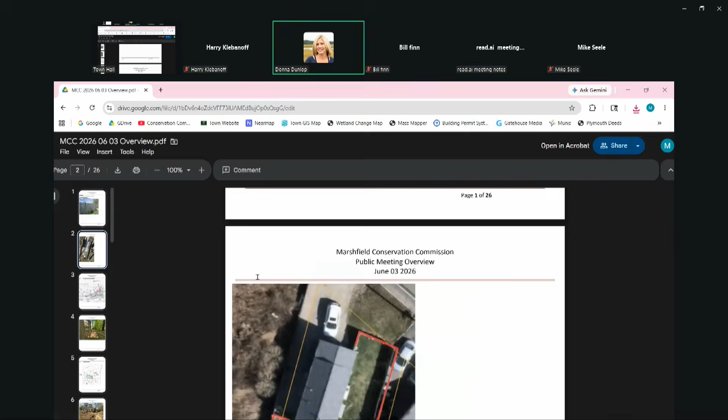Are you just seeking a one-for-one replacement of what's presently there? And next to it, that fence doesn't belong to me. I'm not doing anything alongside the wetlands, so if you're looking at that picture, the way I see it, it would be the fence to the right, in between the two properties, and then the fence in the back.

Okay, and what type of fence are you proposing? Wooden.

Mike, do you have any comments? Yes, my understanding is that essentially it would be a one-for-one. It would be built essentially in this style here, as noted by the homeowner. The property owner to the right of them in this picture owns that fence. They're building essentially a section of fence that they own adjacent to that fence, bordering the property. But to my understanding, it's going to be a 6-foot wood stockade fence as seen in the site visit pictures.

Is that accurate, Ms. Dunlop? It's hard for me to explain. Have you seen the wood panels on the front of the property? I don't know if you went to view it. It'd be the same wood. I don't know how wide the panels are. Maybe, I don't know how to explain that.

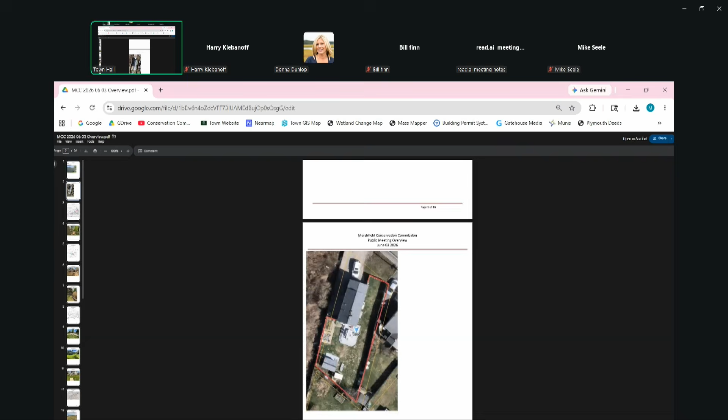Is there a way for you to view the front? No. Is the person that was there who viewed it available? Yeah, I viewed it. How tall would you say that front fence is? It's about 6 feet, and the planks are more of a timber plank than a typical picket fence.

Yeah, so I guess I just don't know the language. I didn't know how to be prepared for that. So whatever that is, I want it to look like that fence, since I'm paying for this in full myself.

What, in this area, is there certain spacing that's required, Mike? Yeah, this is within a barrier beach coastal dune. Typically with fences built in this area, they're built with adequate spacing on the bottom and between pickets to allow for the flowage of floodwaters, which is something the commission typically permits with a 1-inch gap between pickets or planks, and then 6 inches between the lowest horizontal member of that fence and the ground.

Is that something you're amenable to? I guess so, if you could send me that information. Yeah, we can do that. I mean, if it's comparable to the other fences, that's fine too.

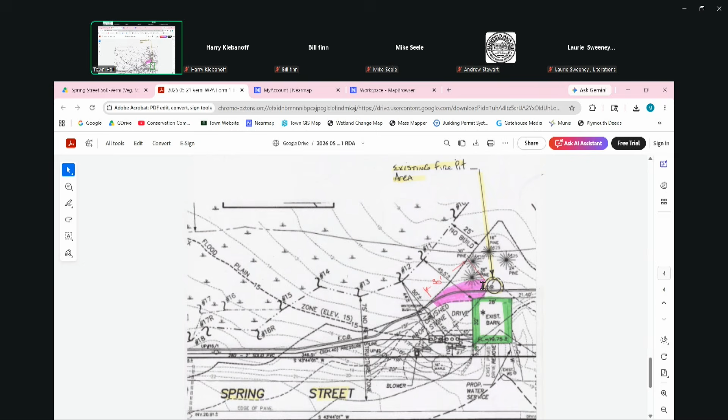And then this area highlighted behind the structure is the proposed patio area. And to build that, it's got to be permeable, either flagstone or pavers. Yes, so he's suggesting a gravel base with a brick border, and then some flagstone laid out intermittently as stepping stones in the area.

So I guess what you discovered is that there are conservation markers along the side of the house, but as part of his original order of conditions back in 2017, 2018, there were supposed to be conservation markers along the back, right? Yes, according to their orders of condition, for the development of that existing barn into a single-family home, they had to place conservation markers every 25 feet along the 25-foot setback, which I didn't note out in the field, especially in this area behind the fire pit.

I didn't note any. So that will have to be done by the homeowner in order to receive your certificate of compliance for that scope of work. Okay.

But as far as our hearing goes for tonight, in terms of the patio and the clearing of the brush, do you have any issues with that? I think it would be helpful to get those conservation markers on the 25-foot setback, especially in that area back there, around that fire pit and where they want to expand the patio.

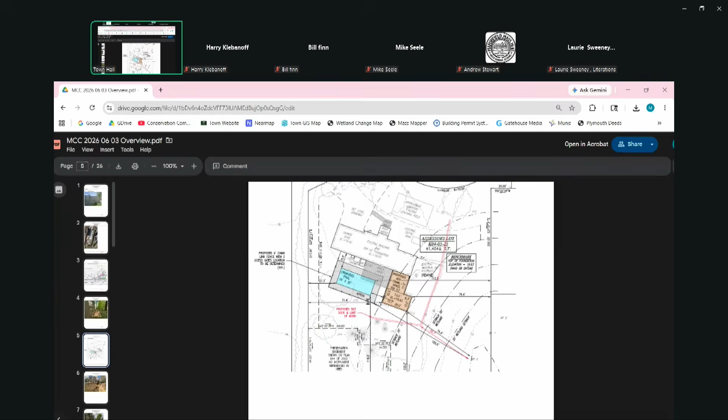Thank you. Mike, could you explain what's going on with this one? Yeah, so I did receive a call from Mr. Grady a few weeks ago, alerting me that there had been some sort of miscommunication and that ground had already broke on this project. Here I have captured my site visit photos.

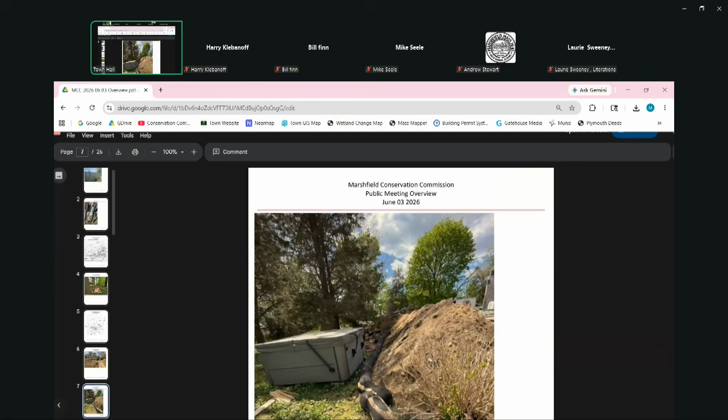At the time, when I visited the site, they had all appropriate erosion control measures up. As you can see, they had a 12-inch diameter erosion control sock. The work itself was within allowable limits by law, from my observations. So I instructed the homeowner that he could proceed at his own risk, and that this would obviously go through permitting where the commission could ultimately put more conditions on it or what have you. But yes, from my observations, the erosion controls were in place and effective.

As far as commissioners, I visited the site today. The work is substantially well along, but everything looks good. I'm not sure exactly where the glitch took place.

How did the permit get issued? So it came before the Conservation Commission, and as part of our normal review process, we take a look at GIS data and layers and everything. From what we could see, the wetlands were estimated well off the property and well over 100 feet away. When Grady was doing the site plans and sent out the wetland scientists, it turns out that the wetland came closer than what was anticipated. So that's essentially how it cleared through us.

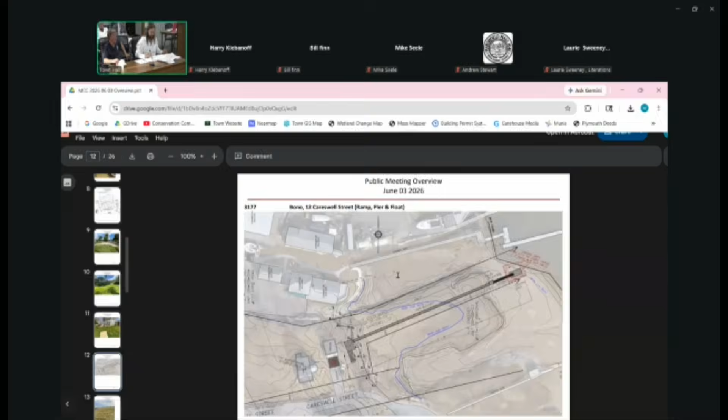Sure, I'm Colin Bono of 12 Careswell Street. I did my best to address the concerns that you had from the last meeting. So if you want me to just go down the list, I can do that. On your site plan, it's a little updated. One particular area, the dredging, the dredged area, shows a little more detail, both on the site itself and the graphic down below. So that was one of the items that you wanted to see.

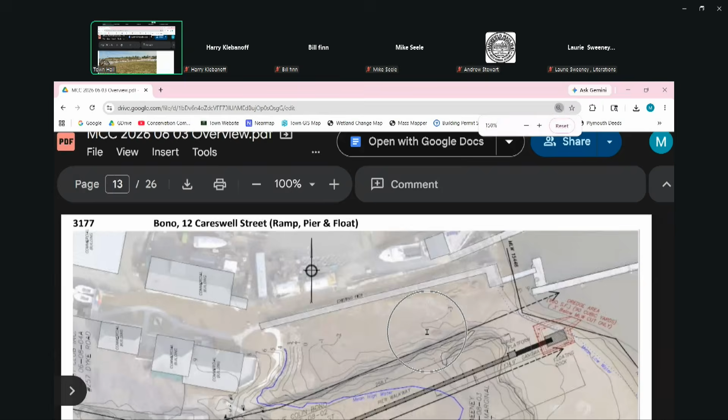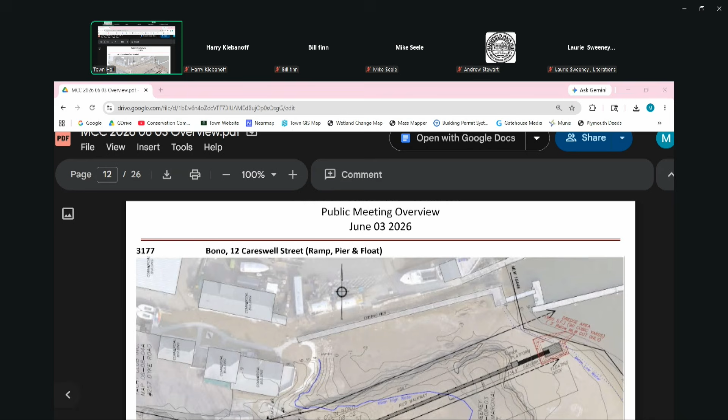A couple of the other items were fees. I know the riverfront area question came up, as well as the dredged area, and I consulted with Greg DeCesar to get some clarification on that. I think he's probably the most senior person over at Wetlands and DEP, and he said that the NOI that I filed was correct and that it shouldn't be updated or replaced. He gave a bylaw, or regulation rather, for the dredging to not appear in the fee structure, as long as it's directly associated with the construction of a new dock, pier, or other structure. So that was, I know Sam, that was your concern, so make sure I got that. There's a DEP file number that was assigned from the last meeting.

So on your copies, it isn't on there, but I printed you out brand new copies if you want to see it. I know it's typically not on there, but you suggested it might want to be on there, so it's on there if you want it to be on there.

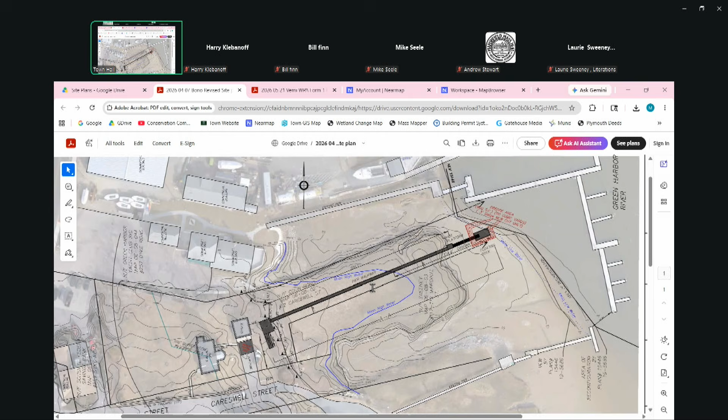You wanted a site visit, which happened on the 22nd, and I addressed an additional variance that was needed for the first of your performance standards, E1. It's got a couple parts to it, but the particular part you were wondering about was: no dock or pier shall extend further from the shore than a point equal to half the lot's water frontage, measured as a straight line between the lot's waterfront corners.

So to address that, the reason I'm requesting relief from the pier length requirement is that the unique conditions of this property make strict compliance impractical. The bylaw would limit the pier to approximately 25 feet based on my 50 feet of water frontage.

A pier of that length would not accomplish its intended purpose because of the substantial salt marsh located between the upland and navigable water. Although the proposed pier measures approximately 138 feet from mean high water, that doesn't tell the whole story. Roughly half of the length is simply crossing the marsh. So once you reach the edge of the marsh, the pier extends only about 65 feet further to provide access to navigable water. The length is not being driven by a desire to build an unusually large pier.

It is being driven by the natural conditions of the site and the need to span the marsh in order to reach the water. I would also note that there are several piers and docks in the immediate area with similar lengths. The proposal, therefore, is consistent with the existing character of the neighborhood and reflects the practical realities of waterfront access in this section of Green Harbor.

I believe that the pier provides an environmental benefit when compared to the alternative. Construction of the pier involves a limited and temporary disturbance during installation. Once complete, access occurs above the marsh and resource area. Without the pier, access to the water would require repeat foot traffic through the marsh over time, resulting in ongoing disturbance to vegetation, soils, and habitat.

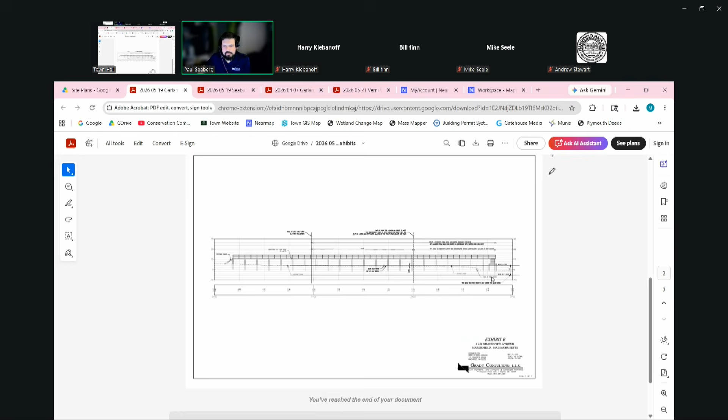So an average high tide event is relative to a mean low water datum, which is what you typically see as the height reference on the tide charts. This is shown as that dark line that runs horizontally on the screen, labeled MHW, mean high water. This relates to elevation 3.95 on the site plan, which is a different datum.

So the top of the salt marsh is within 0.75 feet of the mean high water elevation. As you can see on this view, there's a dimension in the middle of the screen showing that 0.75 foot difference. So the salt marsh elevation is just below the mean high tide elevation.

What this means is a very small change in the height of the high tide would result in a significant change in the location of the high water mark of the property. The left side of the screen, that vertical line, is your mean high tide location. The dashed line to the right of that would result from a 0.75 foot difference in the high tide elevation, shifting that line 120.6 feet closer to Little's Creek.

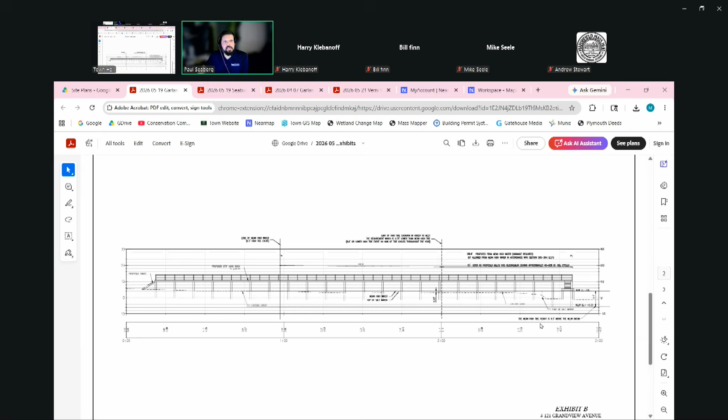With that said, I'd be happy to answer any questions the commission may have, or turn it back over to Adam for any comments. No, thank you. We're happy to answer any questions.

Do commissioners have any questions or additional comments? I had a question, Attorney Brodsky. In your opening statement you mentioned a waiver - is that a synonym for variance? Yes, it's been used interchangeably. Okay, I just wanted to clarify in the discussion of these things.

I think another item that was requested at the last meeting was an alternatives analysis supporting this request. I don't believe any of that had been submitted. I do not recall being requested to provide that. I take detailed notes and try to take care in providing additional information.

Again, I think in this instance, and I'll defer to Mr. Garland, it's a no-build alternative or a build alternative. There's nothing in between that would allow access to this water. And a no-build alternative would, I guess, require the property owners to drag their kayaks and walk across that length of salt marsh.

I don't think from an environmental protection point of view that that's a good solution, which is why, particularly with respect to salt marsh - and we discussed this - it is one of the most, if not the most, regulated coastal wetland resource area, which has a no adverse effect standard, except that there's an express provision under the state act which allows pile-supported structures so that homeowners and property owners can access the water.

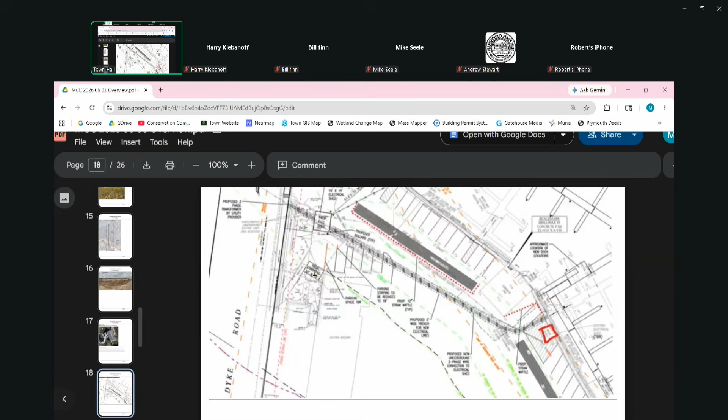Not that it's our jurisdiction at all, but I would assume that they have a building permit for this or something of that sort? How does that work? I know that they would need a building permit for the construction of the shed, especially utilities, but I would defer to the building department on exact specifications. Yeah, no, that's not our jurisdiction, I just...

No issues with that? No issues. Much better. Pretty okay? All right. I move to approve as de minimis the change of location for the electrical shed at 239 Dyke Road. May I have a second? Second. All in favor? Aye.

And 49 Waterman Avenue, where do we stand on that one? I think we had some questions about... yes, Mr. Shaughnessy's online. He did provide confirmation from his neighbor that he's on board with the site plans there. I uploaded the original RDA for the commission's reference.

Mr. Shaughnessy, would you like to speak further on this project? Your iPhone is muted, by the way, so you'll have to unmute your microphone. I think our concern was whether or not the neighbor was on board. Yes, that was the main concern. He has confirmation from Mr. Manning, via text message that he sent me.

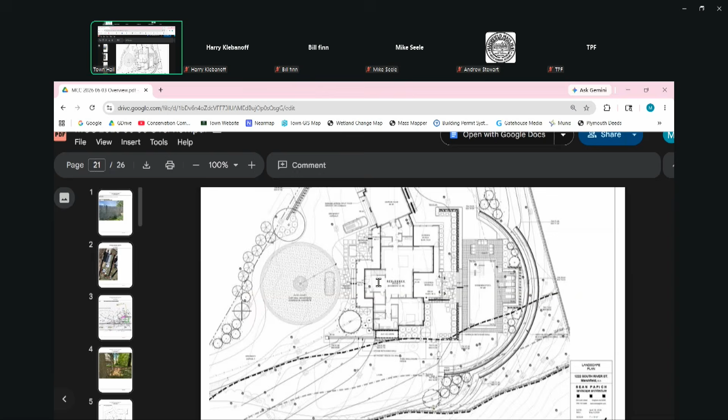They want to put in a retaining wall, just around the perimeter of the pool. So here's the original design, with the pool house and mechanicals within the buffer zone. They want to remove that and add a retaining wall to stabilize the back of this pool area. They're seeking to capture these changes on an as-built site plan.

Mike, is that all within the limited disturbance that was approved? Only this area here - you can see the 100-foot buffer zone, so only a fraction of that pool area is within our jurisdiction. But it's all within the red line, the silt sock, I would assume? Is that correct? Yes, it's all within the silt socked area.

Okay, so they're adding some retaining wall, but taking out a structure? Yes. The slope will probably vegetate a lot better too. Yeah. So they just want to capture that in an as-built? Yes, that's correct. Do we even need a vote on that?

Well, we'll vote. I move to approve the removal of the pool house, the addition of a retaining wall, and all to be captured in the as-built. May I have a second? Second. All in favor? Aye. Aye. Okay, the Marshfield Airport.

We have had an ongoing issue with vegetation management there. I have informed the commission of what has happened. Bottom line, we got stopped from finishing vegetative maintenance that was begun back in April, and we are now at risk of having the Phragmites, which are revegetating, make it impossible to continue clearing the debris that was left.

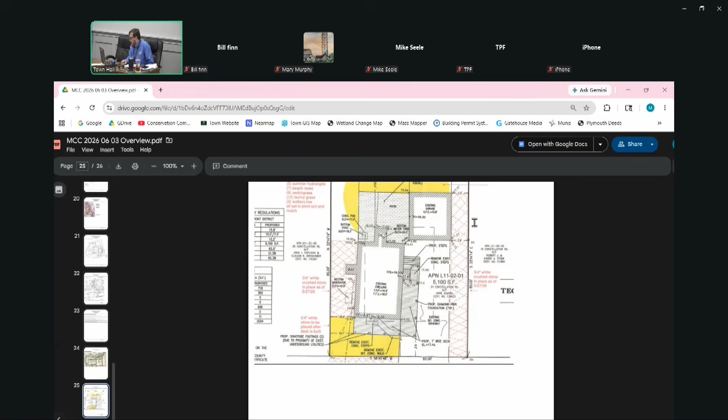So on this side here, they wanted to put in a gravel area. I got a call from a neighbor and a complaint saying that they were doing work outside the approved work boundaries. I went out on site, and it was revealed that they had a lot of other changes to the approved site plan planned for the property. So I figured coming in front of the commission would be the best route, and they're requesting to capture these changes on the as-built site plan.

Okay, can you explain the changes to us? Yes, my name's Bob Morell. I'm coordinating the work for Annie, so I'll address this on her behalf. First of all, like I told Mike, we apologize for this. We didn't really realize that we had the order of conditions for the patio and the deck, but we didn't realize it also included any kind of lawns or anything like that. So to get things squared away, I submitted all this paperwork that truly shows everything that's going to be done, not only now, but also in November when the deck itself goes in.

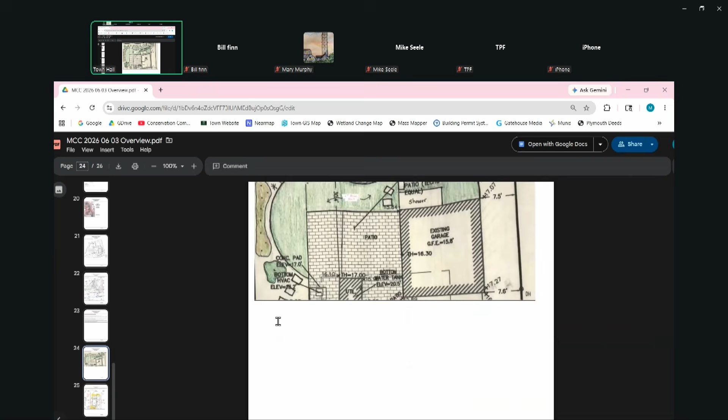So basically, Annie's trying to make the house relatively maintenance-free. She took out all the lawns, basically a couple of inches of lawn and dirt, replaced it with a white crushed stone where the red hash marks are. That's done now. In the back of the house, in the backyard, you see the patio, that's already been addressed with conservation. That yellow is going to be 1-inch river stone. And then behind the yellow, all through the backyard, is going to be landscaping. There's a plant list on one of those plans - some eastern red cedars, some rose rugosa, some hydrangeas, some different ornamental grasses, all relatively maintenance-free things.

So you're essentially taking what was a very rough-looking lawn and putting down stone, and then landscaping, and one area behind is mulched. What I would propose - again, I didn't realize this should have been in the original notice of intent, shame on me.

It's no reflection on McKenzie Engineering - I never told him about it either, so that's why he didn't show it. What I'd like to do is just show this on the as-built that we do in November, because that deck can't be built until November anyway. So when we do the deck in November, we'll have McKenzie come out, certify everything, update the as-built, and then submit it with our certificate of completion. So that's the hope.

Does anyone have any objections to this? I mean, the biggest change is really the river stone, and then the white stone on the side. None of it's really changed on the grade, right? Oh, no grade changes whatsoever - all permeable. Everything's permeable, the patio's permeable.

I have no issues. I think it's an improvement. It actually does look really nice, I gotta say. I'm sure, the lawns were pretty rough looking. So it does look nice, the white stone. Yeah, I like your plants too.